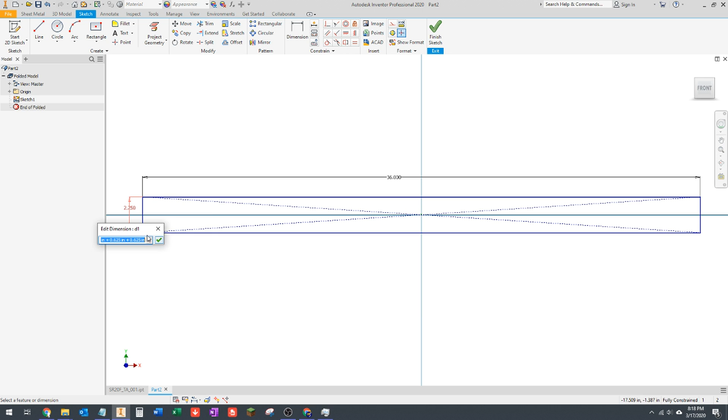Yeah, so I think what I'm going to do right now is make this sheet metal section. It needs to have 1 inch, it needs to be 1 inch wide, for basically modeling this face here. It needs to be... where's my 1 inch wide, and I think I'm going to add 5/8 of an inch on either side for clearance. We might reduce that down later.

Normally when you are CADing something, you have a few more design constraints than this. We've got to kind of make up our own design constraints when we're doing practice CAD.

I'm using 1/16 inch aluminum sheet metal. All right, so this needs to be 1 plus 5/8 plus another 5/8 minus the thickness of the material. So it should be 2.25 in that direction, it should be 2 3/16 in this direction.

Yes, okay, so then we're just going to put a 1 inch flange there. Actually, we're going to do that.

All right, so then Autodesk Material Library, we'll set this to the correct material, which is this aluminum 5052 H32. That's exactly the alloy and heat treatment that we buy. Then I just give it the next number in the list.

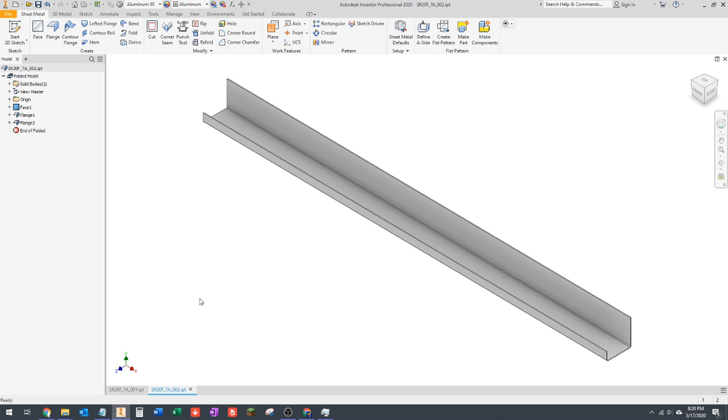We're going to try to keep each half of the tube sections identical because they are rotationally symmetrical, so we can just take this part and rotate it 180 degrees, and it's this part on the other side. So I typically, when I'm doing CAD, don't do a lot of sub-assemblies because I find them obnoxious to navigate through.

So we're going to kind of just plop this whole mechanism in one big assembly. If you don't choose to do it that way, that's fine, on your own CAD, that's just what I do. I think for people who are newer at CAD, it's probably better if you make subassemblies, just because it's easier to keep things organized that way, and you don't have to worry so much about assemblies with a lot of constraints, where those constraints can start to interfere and cause issues.

Changing my visual settings here to make this easier to work on. All right, so going to constrain that to there.

I'm not really bothering - the purpose of this live stream is to kind of teach CAD and teach design. I'm not going to bother teaching the controls for Inventor. We've got CAD class resources from a year or two ago that go into all that stuff, so I'm using mostly keyboard shortcuts and stuff just to make this go faster and be a little more interesting to watch.

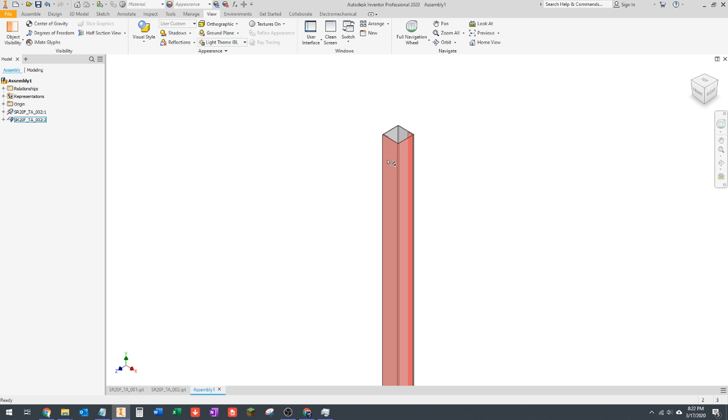All right, so what we should have right now is 2.25 in that direction, 2.25 in that direction. So we're just going to kind of rough out all of our sheet metal all the way up to the final stage. Also, I don't know why that grounded that first part, I shouldn't have done that, but it's fine.

We'll unground it later. Okay, so we're going to place in our tube. I'm rotating things like that to keep known pieces of geometry at the top or the bottom. So that should be a 5/8 offset.

That should also be a 5/8 offset. Now, I think we're going to start with when you have a cascading mechanism like this, it's easiest to design it so that part of each stage is sticking out of the previous stage. There are ways to design it so that everything's completely flush, but because I've never designed one of these before, I'm not 100% sure what those would be, and I don't want to take the time and effort to do it.

It is possible my phone might die here. Should be fine for now. Okay, so I'm going to give this a save. I'm going to call it SR20F TA assembly 1. There will probably be only one assembly, but we might do some sub-assemblies for bearing blocks or something as we get farther along. Don't need that open at the moment.

We're going to just go ahead and do a save as on this and call it 3. So this will be stage 1. Okay, so then what we're going to do is go in here, place this 1 inch with 2.25.

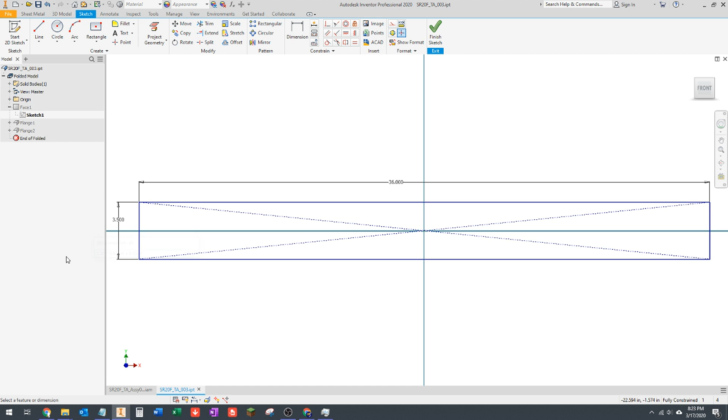It's been a few years since I've used SolidWorks, but a key difference between SolidWorks, at least when I used it, and Inventor, is that Inventor keeps those equations in those boxes, and SolidWorks kind of solves the equation and then gets rid of it, whereas Inventor the equation stays there, which is kind of a nice feature in my opinion. I suppose it depends on how you use those equation features.

All right, so going to do the same thing on this stage as we did on the previous one, constrain it all together in a way that makes some amount of sense. All right, and there to there, and that should be a 5/8 offset for all of these. That 5/8 number is kind of arbitrary, but mostly it's derived from it being an 1/8 of an inch larger than the bearing that we're going to put in here.

And now there can be slots for the bearings, and we may end up having to do that because we got to deal with this flange and everything, and the gap between that and that is exactly 1/2 inch. However, I don't know exactly where the bearing is going to be, left to right in here, because if it's right here on the corner, then it'll interfere with this flange, and we'll have to notch the flange where the bearings are. But if we move it over a little bit, then the bearing will clear completely.

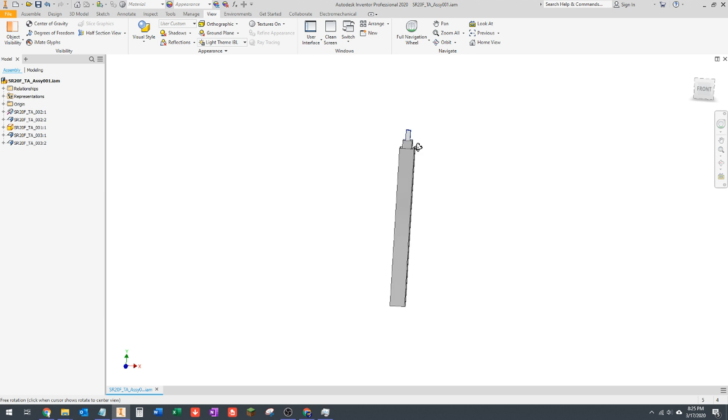So, all right, let's—I closed that part. I don't know why. Let's do one more save as on this. This was 3 inches, right? Not there. Oops, clicked the wrong surface. Oh, 3.5. Okay, so this is 3.5 in that direction and 3.5 in that direction.

Everything is as it should be. All right. So then we'll do the same thing we did before. Take 2.25 out of here, put in 3.5. Oh, shoot, I forgot to pause.

Yes. Hang on, I gotta wait for this to sync. Okay, pause syncing. All right. And then this flange, do the same thing. See, that's what happens when you don't pause syncing—when you save it, it starts syncing to Google Drive, and then if you try to save again a few seconds later, it won't let you edit the file. So you gotta wait for it to sync, then turn off syncing, then save it.

All right. Oops. 1, 2, 3. Back where it was. Z. Now the reason I'm rotating this three times is just because I have a particular side of the sheet metal that I had intended to be the top, and another side that I intended to be the bottom, and I'm trying to maintain that.

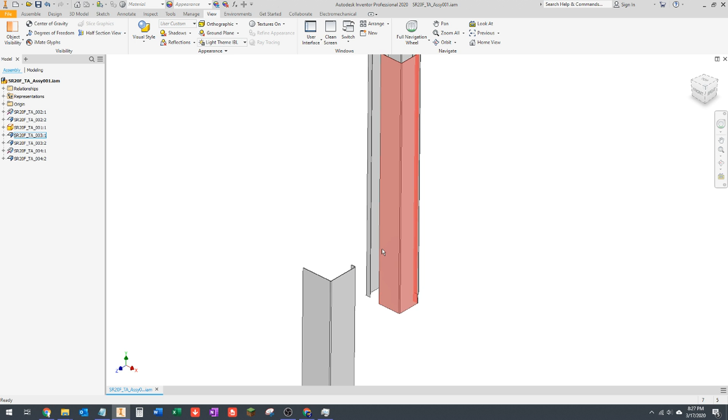All right, so I went ahead and grounded this at origin. So I'm going to go ahead and unground the first part, so I can kind of move all this stuff out of the way. You should always have a grounded part in your assemblies, especially in Inventor, but it applies to SolidWorks, and I'm sure Onshape too. I haven't used Onshape very much, but there we have it.

Alright, so that's all locked into place, and we should be sitting at 4.75. So fairly bulky, but not an unreasonable size.

If this were to be a primary mechanism on your robot, like an extendable arm for placing game pieces on some scoring element, then this would be a perfectly acceptable size for that. If this were a climber and you wanted two of these, one on either side of your robot, this might be a little bulky depending on your packaging constraints, but I think it's a good starting place for me, having not designed one of these before.

Alright, so let's pull all this stuff out. Okay, so I think we're going to go... So when you're designing any kind of elevator or something like that, when it's extended you've got this overlap. Not sure what to call it, but it's just the final overlap of the stages.

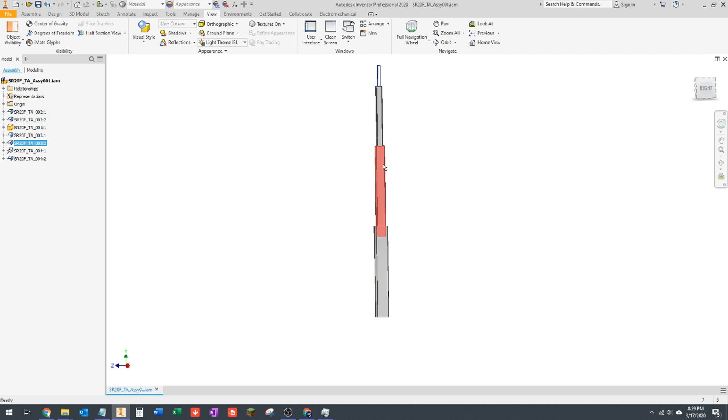Basically, the smaller the final overlap you have, the more extension you get for a smaller overall package height, which is a very desirable feature. However, the more flimsy the mechanism is when it's extended. We're going to go ahead and be what I'd consider fairly aggressive.

I was going to do 4 inches, but now I'm kind of chickening out. I think maybe 6. That's still pretty far.

Alright, so let's start doing some constraints here to kind of lock in this extension and take a look at this. This isn't super critical to figure out right now, because we can figure it out later, but I want to start getting these in here so we can start putting components in this assembly. So I should click the other one first. And then there. Alright, so I think we're going to have them start at 1.5 inches because we're going to need a pulley, like a timing belt pulley, to stick completely out the top.

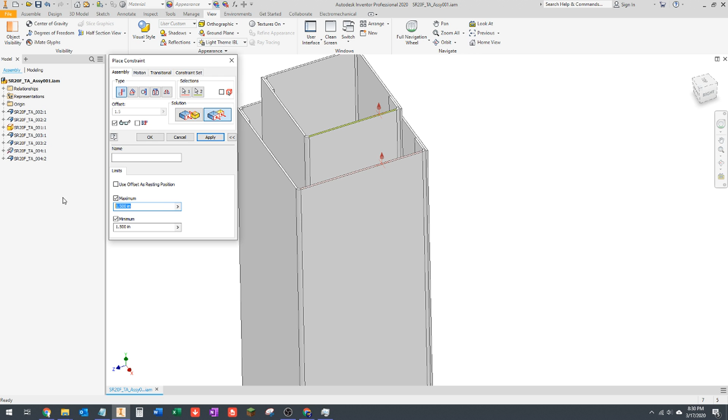Let's see here. Okay, and then the maximum that we could ever go would be the length of the tube, which is like 36 inches right now. So if we want 6 inches of overlap, the maximum would be 30. So when we pull this out, it'll stop, and then we should be able to measure 6 inches of overlap.

Yes. Alright, so we're going to do the same thing on all the stages. We're going to click the lower stage first, then the upper stage, then fill out our minimums and maximums. So 30 max, 1.5 minimum. Make sure that actually works.

Good. And then this tube we might end up making a little longer, because it's helpful to have a little extra sticking out the top on the final stage to actually mount your mechanism to.

Alright, so from here we're going to set up the constraints the same way, but if we make this tube longer, we'll have to adjust these. So maximum of 30, minimum of 1.5.

Alright, okay, so fully extended we get, let's see, an overall height — that's probably the best way to do this — 126 inches. And with everything collapsed, I'm not going to bother rigging the continuous versus cascading behavior of this. It's just too much of a pain in the butt.

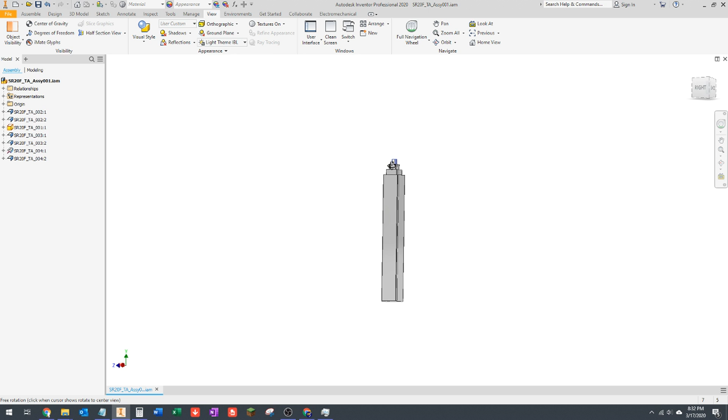So 40 — this is obviously way too tall to fit on a 2020 robot that fits under the trench. You'd need this whole package to be closer to like 22 inches or something fully collapsed, and that's including a hook.

So this actual telescoping part would need to be quite a bit shorter, unless you mount this on an angle — like have it on your robot at an angle and then actuate it up with pneumatics, which a lot of teams have done.

Alright, so okay, let's figure out where we're going. Stream seems to be okay.

I see several of my students and several people who are not my students in the chat, so hello everybody. Let me know if we're dropping frames or doing stupid stuff. OBS is not happy, but it is functioning, so that's about all that can be said about everything right now.

So one of the things you can do if you need to get more stroke length or a lower collapsed height is you can do some work to take this from 1.5 inches, or whatever it is on your design, and make this smaller — bring it down to an inch, maybe get it down to half an inch. And as we get some more components in here, we'll start playing around with those dimensions.

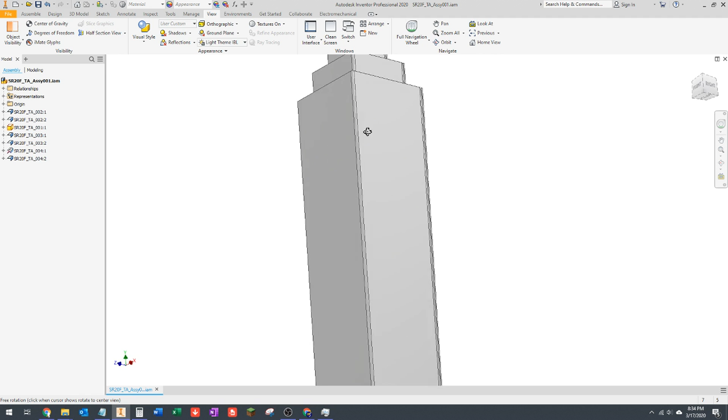I'm not 100% sure if it makes more sense to put the rivet holes in now. Normally I say to everybody, do not put rivet holes in until you're absolutely done. But in this case, the rivet holes will tell us where the rivets are going to be, which is a fairly major obstacle to the actual mechanical function of the mechanism.

So it's probably going to be most helpful to put the rivet holes in. And actually, because I copied this part 3 times, I kind of wish I had put the holes in before I copied it, but I guess that's what I get. So we're going to just go ahead and put these holes in real quick.

We always, on Stellar, use 3/16 rivets. So that's what we're going to use here. The hole size for that is 0.196 inches. Use the hole feature.

I always pattern the hole feature. I don't pattern the center points in the sketches. I pattern the hole feature. This will be like 71 holes.

We'll do one every half inch. When you actually build this, you would never put a hole every... you know what? Actually, because we're going to have bearing shafts and stuff in here, I'm actually going to change that. I'm going to go to 36 holes an inch apart.

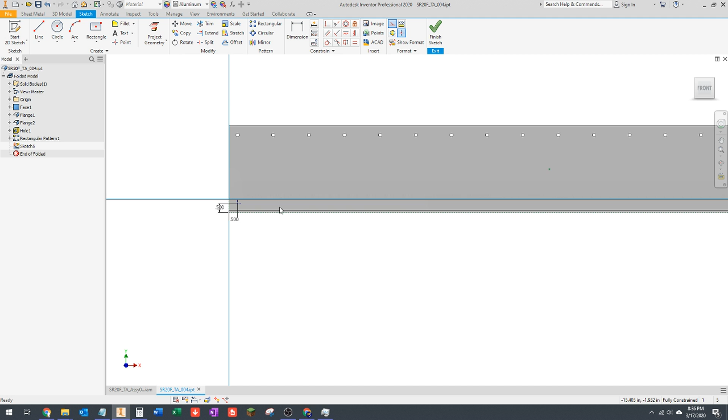All right, so we're going to do a hole. We're not going to send the hole through the back side just yet. We might go back and add the holes over there because they might be useful for mounting stuff later on down the road. But for now, we're just going to put it through just this flange.

2-inch spacing, 18 holes. All right, then we just got to do that 3 more times because I was an idiot and I didn't put the holes in before I copied the parts. So here we are.

It shouldn't take that long though. Once you figure out a piece of geometry, it's pretty easy to go in and do it. Repeat it a couple of times if you need to.

2 inches, 18. Oh, did I type? Why did I do that? Okay.

Construction geometry on. Notice I'm measuring to the very edge of the part. I'm not measuring to this tangent line. That's pretty important.

Okay, so every 2 inches, 18 holes. Give it a save. All right, next one. This will be the last part.

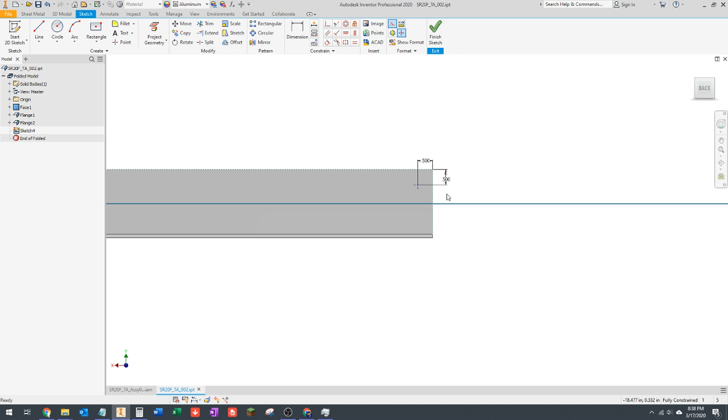So what we'll do once we're done here, we're going to pull in some bearings and start trying to locate bearings for all of the stages. We'll start with the bottom one and just work our way towards the top. Or maybe we'll start at the top. I think we'll start at the top and work our way towards the bottom. Okay.

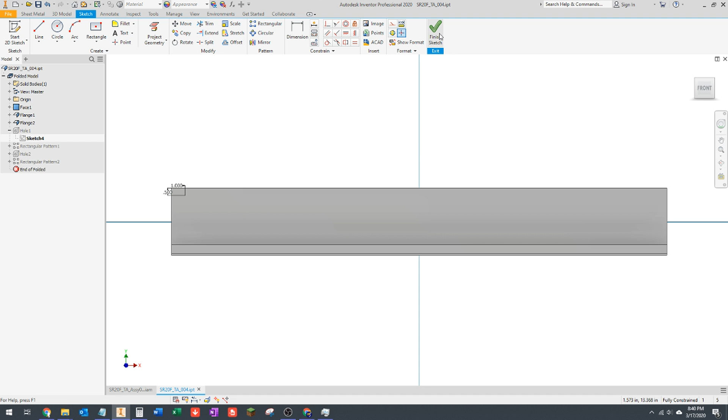This is why it's nice that even though I didn't copy all these parts, I went and did all the dimensions and geometry the exact same way, so even though they weren't copied, you can't tell. I modeled every single one of these the exact same way.

All right, give that an update. Okay, so now we have the ability to rivet this together. We'll go in and add corner rounds and everything when this is completely finished.

Let's flip over to our sketch here. Hard to tell, but basically these top bearings are going to mount to this stage, so there's going to be bearings on all four sides of this tube.

Let's get an angle here. There's going to be bearings on all four sides of the tube. I think it'll be 2 bearings per side, because that'll provide torsional support so it can't twist and pop out of the bearings. So there'll be 1, 2 bearings on this side, patterned all the way around. So 2 bearings on each of the 4 sides at the top. And then we're going to have...

The next thing is going to be the tricky part. I kind of wish I had thought of this before I modeled all of this.

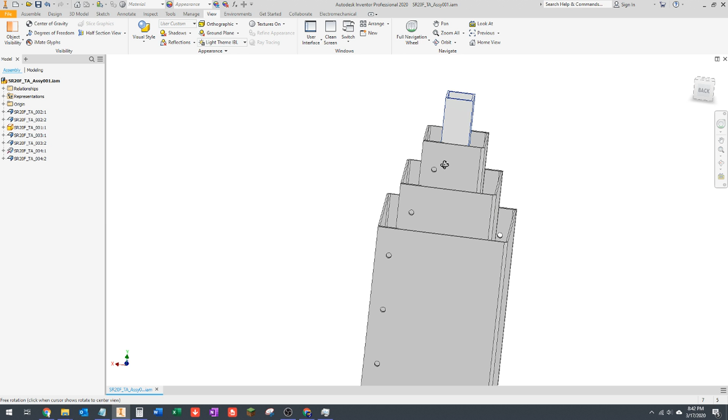My plan was to have the bearings down at the bottom mounted to the upper stage. So for the 3rd stage, this tube, I'd have brackets that rivet to the sides of the tube to support the bearings, and the bearings would roll on the inside of the previous stage. The problem with that is going to be twofold.

First of all, this flange is at a different level than this over here, which means I'd have 2 bearings mounted at different distances, and I don't want to deal with that, because it's going to cause a cascade of other problems and add complexity—you'd basically have to put the bearings on different shafts, which isn't particularly helpful.

The other solution would be to have the bearings roll in the middle, but that potentially gets in the way of the belt. I suppose we could do a hybrid solution where we have bearings that roll in the middle here, right on this outer piece, and the same on the other side, plus a bearing here and a bearing here, leaving room for the belt in the middle.

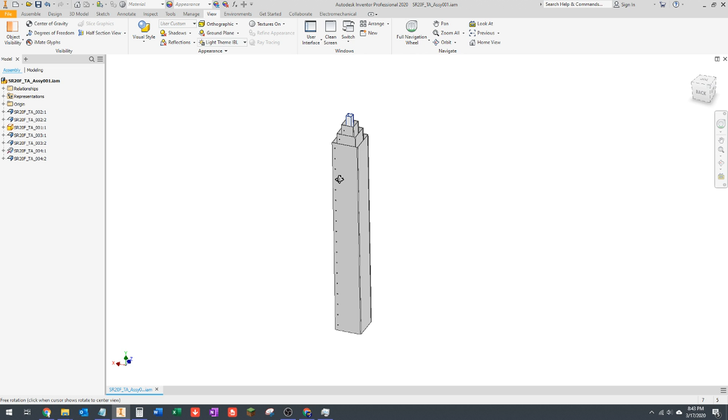So actually, I'm wondering if it might be better to get the belts in here now and do that first, and then do the bearings after, because the belts take a lot more room and have to be in a specific spot, whereas the bearings can kind of just be stuck wherever they fit. So let's do that.

Also, one note—I'm not going to do this. This is the drive, so this would be like the motor that drives this pulley. It's going to be moved down because there's only 90 degrees of wrap on this pulley, which isn't enough to drive a high torque mechanism like this. But we'll cross that bridge.

This belt path is going to be a pain in the butt to design—probably not going to get to that tonight. I'm probably just going to place this pulley and this pulley with a dummy belt in there for now, and come back to add the gearbox and stuff later.

All right, let's see. Let's start at the top. Basically, on one side—I'm going to say this side—we're going to need a pulley. We'll have to cut a hole in here, and then have a pulley with a shaft that goes across, where the pulley can bridge the gap between here and here.

The problem with that is from here to here is 1.188 inches, so the middle should be right in the center. Is that right? Yeah, the middle of where the pulley would be is right in the center of this piece of sheet metal, which means if we want a shaft going all the way across, we've got to cut a slot in this, which takes away basically all of the strength.

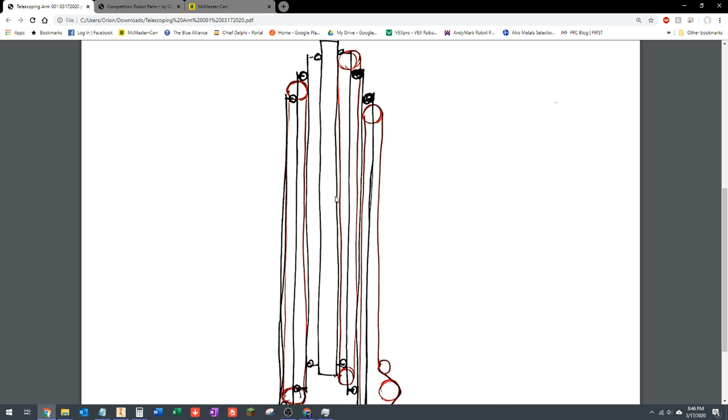So I don't know, I don't really want to do that. What I'd rather do is shift the pulley to one side or the other and add spacer blocks or something. This drawing doesn't do a great job explaining it, but the belt is basically attached to this stage at the bottom with a clamp, or you could even drill a hole in the belt and rivet it in place. I'm not sure the best way to do that. Probably with a clamp, that's probably how we're going to do it.

Maybe a 3D printed one with some teeth in it. Basically, the clamp would go on the inside of the belt and bolt to this upper stage, and the same thing would be done on the two stages previous to bolt to this stage, and that's basically how you rig a cascading elevator.

So as this intermediate stage goes up, this clamped spot here to the lower stage basically moves down relative to the intermediate stage, which causes the belt to roll, which causes the upper stage to move up in relation to the intermediate stage. That's a kind of difficult motion to describe. So if you don't understand what I'm talking about, I'm not sure I'm going to be able to do a better job explaining it here.

It makes a little more sense if you see an animation of it, and it makes 100% complete sense if you actually have a physical device in your hand to move around. It's a fairly intuitive motion, it's just not necessarily intuitive unless you have a physical one in your hands.

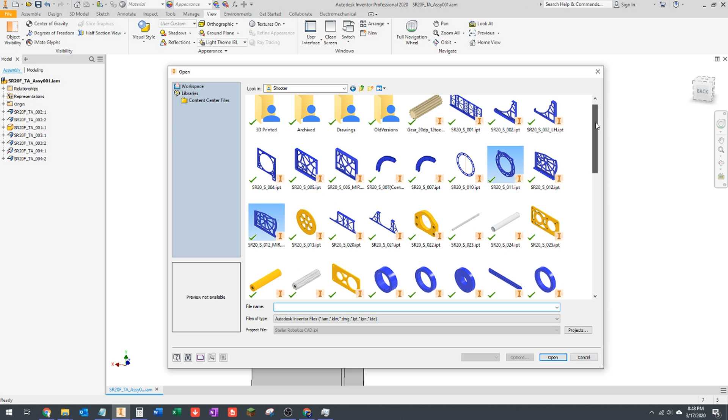So we're going to cheat a little bit and just grab one of the Stellar Robotics CAD models. I'm going to grab this contracted one because that's a little easier. We're just going to copy that, take it over to our telescoping arm folder, paste it down, give it a number, and then open it.

All right, so this is 18 teeth. Basically this is designed to be 3D printed with no support material, which is why the flanges have these 45-degree angles to avoid creating an overhang. This is for a 15mm wide belt, but we're going to do probably a 9mm wide belt, so we're going to make this a little smaller.

But before we do that, this diameter here is basically where the top of the belt comes to. So this is 1.186 inches. And what's this gap across 2 stages? 1.1. Oh wow, it's almost exactly the same size. All right, we got kind of lucky there. That being said, that still puts the shaft right in the middle of this, which we don't want to do.

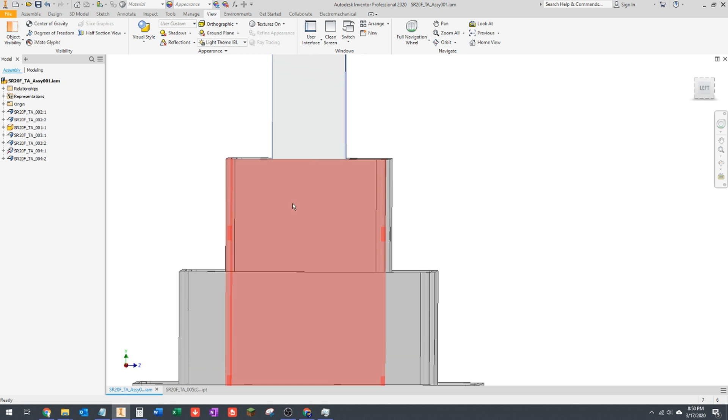Let's see, couple of things we could do here. We're going to modify the bore of this and just put idler bearings in here, and we're going to use the same bearings for this shaft as we are for the rollers here. So let's do that right now. I'm going to suppress this, it's probably going to break a bunch of stuff. No? All right, cool.

All right, so let's create a sketch. Let's project that and then slice the part so we can see what's going on here. So what we're going to do is create this on the other side as well. Construction geometry - actually no, I don't want that to be construction geometry. So we're going to connect the two with the center line. We're going to do a revolve cut because we're going to do a fairly complicated shape in order to allow this to still be 3D printed.

All right, so we're going to make these two collinear. We're going to make... come on, clicking stuff underneath here. All right, that's going to be 45 degrees. Come on, that's going to be 45 degrees. All right, so this needs to be 0.196, which is the thickness of the bearing. Oh, where'd it go? Let's not do that.

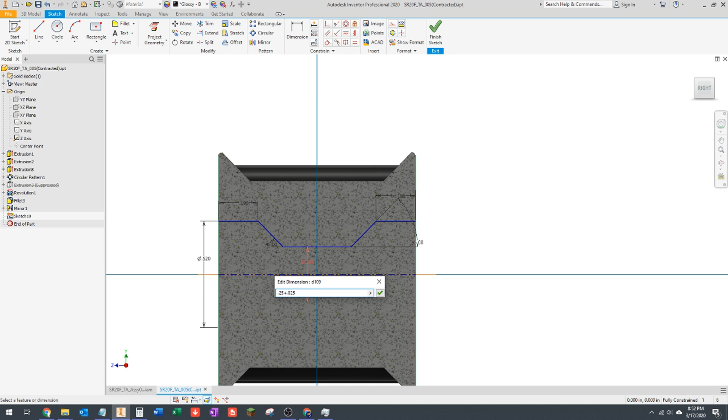Let's create a few dimensions here. 0.5, and then 3D print. Our 3D printers like to shrink by 20 thou on inside holes, so we typically add 20 thousandths to stuff.

The reason for these 45 degree chamfers here is we want a counterbore basically for the bearing to sit in, and then we want a shoulder on the inside of the pulley for the bearing to stop against.

But we can't 3D print a square corner without support material, which we could do, but when you're using a fairly cheap printer like we are, support material creates a nasty surface and it's a pain in the butt to clean off, so it's labor intensive. So we always try to design our parts so they don't need support material, and little tricks like putting a 45 degree angle on the top of an overhang is a good way to do that.

So a bearing will go in here, and then a bearing will go on the other side, and then a 1/4 inch bolt will go through the middle, and the 1/4 inch bolt will be the shaft that this just spins on.

The drive pulleys will need to have this hex bore. We'll turn the hex bore back on for those, but we'll do a save as on this a little later when we're ready for that, and delete out what we did and turn the hex bore back on.

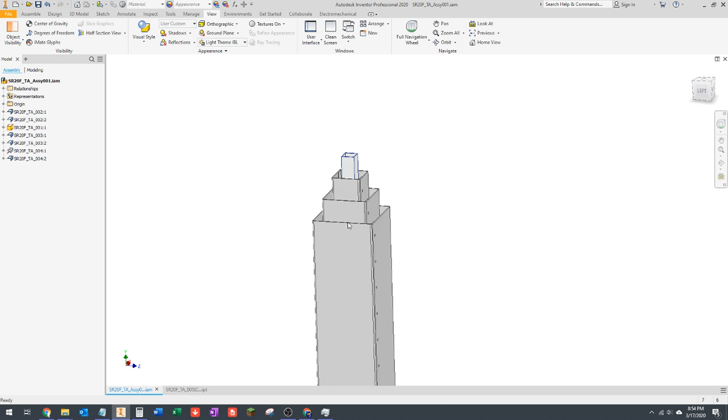0.709, so how much room? From here to here is 0.125. That means if we wanted to keep a pulley centered, we could put a little square hole in here. I'm trying to figure out a way to have the pulley stay right centered on this piece so we don't need spacer blocks on either side. But I'm not seeing a good way to do that.

Alright, I'm going to pull up a link here on my phone. I sent it to myself earlier. Should be way up at the top. Bear with me here.

Alright, so pulley diameter chart, in case I needed to change the size of these pulleys. It only goes down to 16 teeth, but we shouldn't need that because you never really make HTD pulleys less than 16 teeth. The belts aren't really supposed to bend that tightly. That being said, it would be kind of nice if we could.

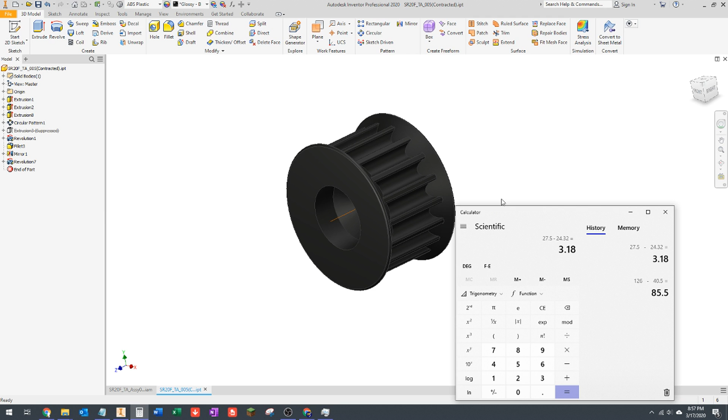So to go down to 16 teeth makes the diameter of the pulley—this is an 18 tooth pulley, by the way—go down minus 24.32, so 3.18 millimeters in diameter. It goes down that much, which is almost exactly 1/8 of an inch.

So the pulley diameter only goes down 1/8 of an inch, which only moves the center of the shaft from right smack in the middle of this piece of sheet metal over 1/16 of an inch, which doesn't really get us anything. Give me one second here, I need to respond to this.

Okay, so I think we're going to leave it at 18 teeth. We are going to make these flanges a bit smaller to make the whole thing a little smaller, because we don't actually need the flanges to come up flush with the top of the belt. But we do want this whole thing to be narrower, so we can shave off some space in a couple of places.

All right, let's do this. This is kind of a mess, the way that I did this. This is 3 millimeters, and then this needs to be—I gotta change the way I did this—and then minus 1, like that. Yeah, and that changes both sides. And then I need to make the whole thing, and these, instead of 4 millimeters, need to be 3 millimeters.

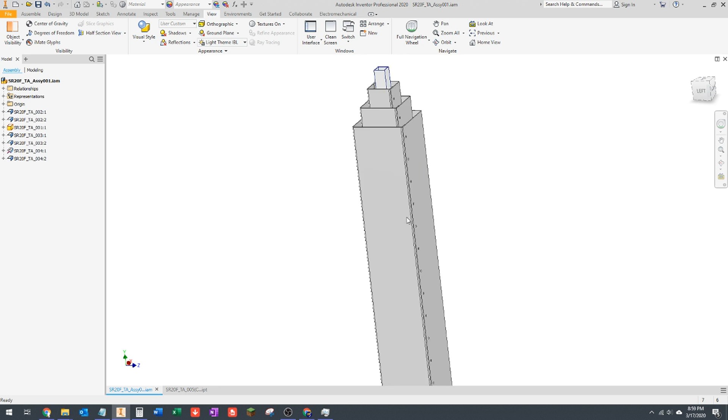Oh yeah, and I realized we don't actually need the slot to be on this side, because we said we were gonna put it here. Is that right? Yeah, because we're gonna put a bearing in the middle on this side, and then on the corners here and here, down at the bottom, I mean. And so that means we can put a belt pulley in the middle here. Do we have enough width for that?

We should. It's going to be really close, but some of this stuff we're going to have to just start going, and I'll figure it out as we go along here.

Okay, so we've got our pulley. All right, so what we can do here, so we need to somehow have a piece that suspends a shaft right in the middle of this part. So let me refer back to my sketch here. Yeah, all right, so let's take this, and this is why I had a specific side that was the top. This side is the top. And it's actually this bottom face.

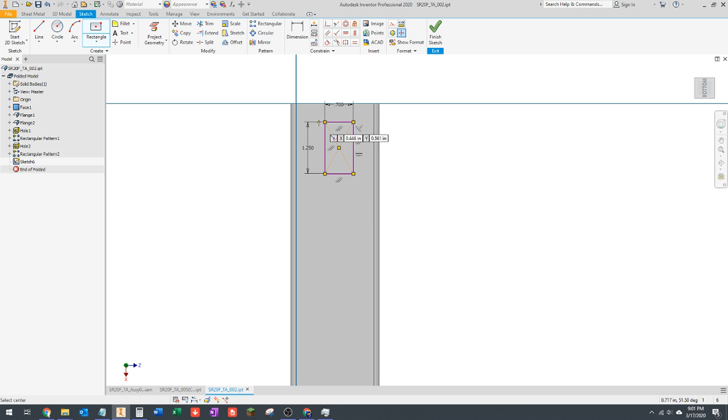So what we need is, well, we'll just do like 1.25 in this dimension and 0.7 in that direction. Project these two sides, put a line across the top, connect that there, and make that line vertical. Oops, I guess I did turn it, so it's that way. Can we make this point?

Oops. Ooh, that's really close. How far is that? 1/8 of an inch. I think it's fine. Okay, so now that gives us clearance for the pulley. Actually, we'll just go ahead and cut that hole.

All right, so there's a slot for a pulley. And this is the part where we might want to make the two halves different because we only need this hole on one side, and we're just losing strength by putting the hole on the other side. But for now, we're going to keep them symmetrical, and we'll call it a lightening hole on the other side. Not great practice, but it's fine for what we're doing.

Okay, so now what we want to do is we don't want to have to take a bolt and go all the way across from one side to the other, because then, like I was saying earlier, we've got to cut basically a groove, like a slot in the sheet metal, which basically loses a lot of strength if we do that. So we would rather start the shaft in the middle somewhere, like kind of just cut a small slot here, and on the other side have the shaft kind of drop into that cup and then stay there. So I can think of a couple of ways to do that.

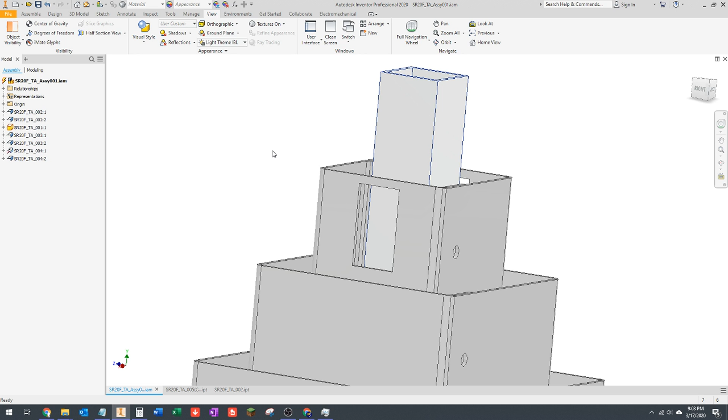I think that they both are going to require that we design some 3D printed parts. I think do it with 3D printed parts. I'm trying to think here of a different way we could do it. I'm trying to avoid machined parts, which we could normally use in this case.

I'm trying to avoid machined parts because Stellar doesn't have a lot of mill-based machining resources, and so that's why I'm designing this with the kind of collection of fabrication resources that we have. We have a sponsor that does sheet metal for us, and then we have a little bit of machining resources, but not extensive enough where I'd want to rely on it to make complicated parts for something like this.

Okay, so I think what we're going to do is we're going to use a dowel pin, and then we're going to capture the dowel pin in a slot and then hold it in place with a 3D printed part on either side. I'll do a little bit better job explaining what I mean as we go.

So this is what, 0.7? Yeah. And this whole thing is 2.25. Puts it from here to here. All right, we'll look for like a 1.5 inch dowel pin. Dowel.

Plane. We need 1/4 inch. And then I need 1.5 inch long. What's like the cheapest one? Oh, these are like oversized though, aren't they? Black oxide.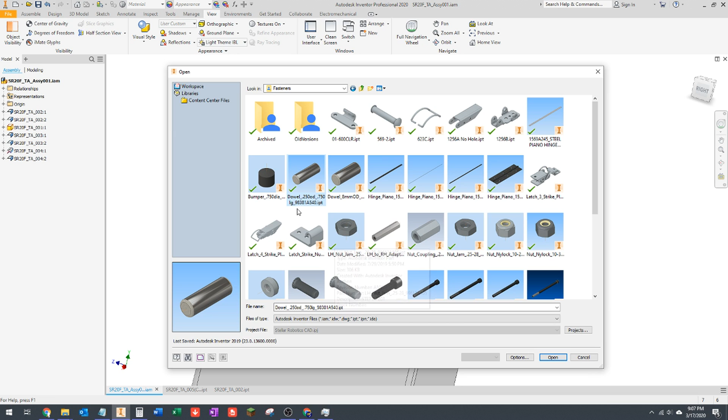I think I already have a model of a dowel pin with the chamfers in it. I don't want to bother downloading that CAD model and importing it. If I already have one, I can just modify it. That would be under fasteners, we have a standard parts library. Yeah, I do. Okay, so I'm going to open this. This is one that's just shorter.

Just do a save as, 1.500, and then I want to put the McMaster part number in just so it's correct. All right, save.

I even put in the colors and everything so it looks nice, because they cold head these, as far as I know. They basically have a machine that cold forms them out of wire to make these ends, so they're really rough and not super precise in the ends. Then they put them in a centerless grinding machine, basically - a special machine that works in bulk and just grinds the cylinder, and doesn't grind the ends. There are higher dollar ones, as far as I know, that you can get where the dowel pins have ground ends as well. But typically, the things you use a dowel pin for, the ends don't matter, like what we're doing here.

All we care is that the bearing slides nicely on the cylindrical part of it. Okay, so this is going to be 0.25, we'll oversize a little bit by like 5 thou. Then we'll do 1.5, and we'll oversize it - actually, we'll oversize it like, I don't know, 20 thousandths. That should be good. Okay, all right, so cut there.

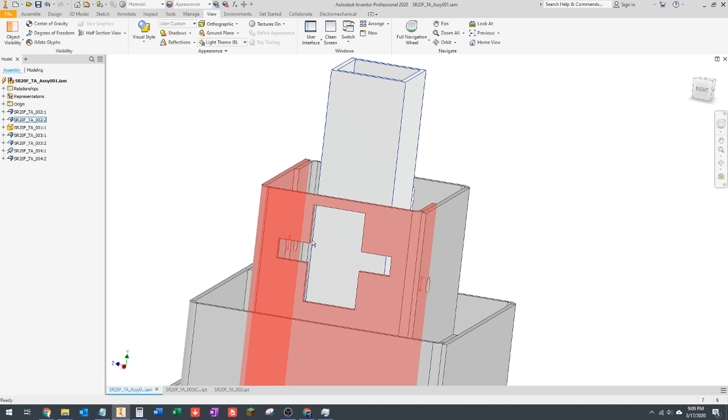All right, so now what's the smallest we can do this? All right, so basically the dowel pin will lay sideways, centered in this slot, and then we'll have something on the front that holds it and something on the back that holds it. And then we'll put a screw through the top and the bottom, kind of like a little pipe clamp or something, and it'll be 3D printed.

But we've got to make sure that however we fasten it, it's not going to get in the way of stuff. Stellar's had a decent amount of luck tapping 3D printed parts - not in high load circumstances. However, in low load circumstances, like what we're dealing with here, it should be okay. So we'll just have a screw on one side and a tapped hole on the other, and that should be sufficient.

All right, yeah, it doesn't matter, I don't need dimensions. Okay, so what we're going to do is a 0.255 - actually, I'm not going to oversize it like that, I got to account for shrinkage here.

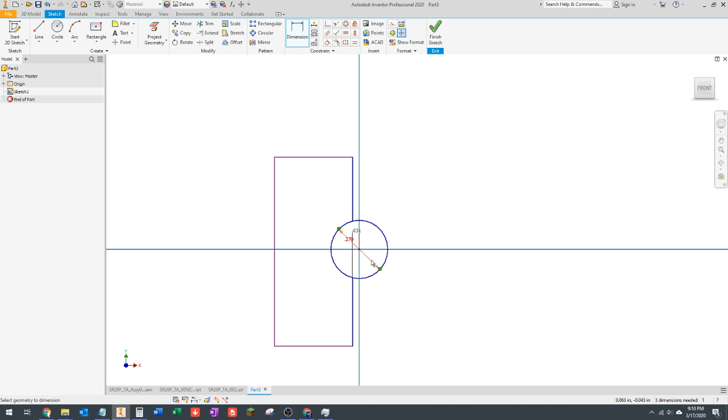All right, so make those collinear, and this offset here represents half the material thickness, because one is going to be on one side of the material, one is going to be on the other side, and the dowel pin is going to be constrained in the middle. So we'll make this 1/4 inch, and then we're going to need at least 3/8 of an inch on the top and on the bottom for support for the screw. So that's 3/8 plus 3/8, which is 3/4, plus another quarter, which is basically 1 inch.

We'll just do an equals constraint, so that's symmetrical. And then this is the dimension we got to be careful of, because we don't want it to stick up too far. Do we think we can get away with that? I think we can get away with that. All right, so we'll do this, we'll do that - we're going to want it at least that thick.

And then 2 holes, 3/8 minus - should be just 3/4, like that. Okay, so then we're going to put just a tapped hole, number 10, 32. Oof, that's really close. Yeah, I don't like that.

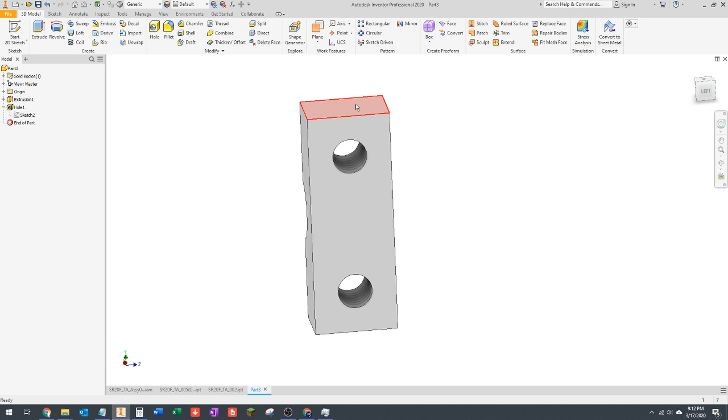Wait, that should have been 5/8 of an inch, not 3/4. There we go. So now it's the same distance from the top as it is from either side. Okay, that looks more like what I was expecting. Inventor doesn't have PLA, so I usually just set things to ABS.

This would get printed probably with this side flat, because it could get printed this way. Actually, this way is probably the better way to print it. So it's okay to radius these corners because that won't create places where it's not contacting the build plate. We'll do a much smaller fillet than that.

I never color anything until the part is actually complete. So in this case, this part is complete. We're not going to make any changes to this part from here on out unless we change the design. So I'm going to go ahead and color it the right color. Plus, we 3D print everything blue anyways. That's just the color of filament that we buy.

It's just Twitter notifications on my phone.

All right, now we're going to do a save as. We'll give it the next number. And instead of the tapped hole, we're just going to do a clearance hole, which will be 0.196 plus 0.02 for shrinkage. So those are quite a bit bigger.

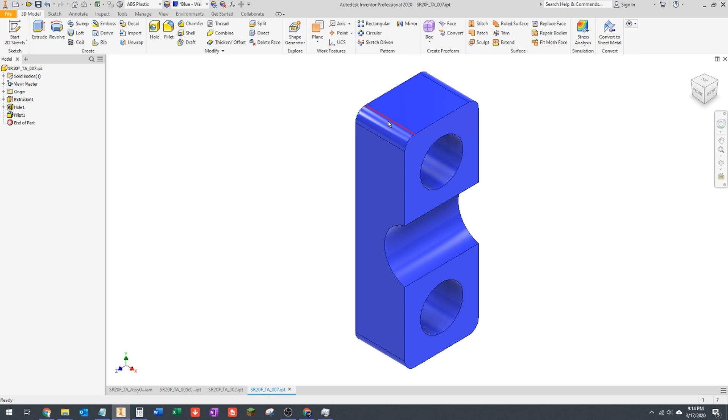This part is on the lower boundary of what I would consider printable, especially for a mechanical component, just because there's not a lot of infill in this part. It's mostly perimeter, which can cause some weird gaps in the part where you don't want it. That being said, there's enough bulk through the body of it that I think it's probably fine, and I'd be perfectly comfortable having this part printed for an actual competition robot during the season.

Okay, so those were 5/8. I want to make sure we've got enough width here. Alright, so we've got to be a little careful where exactly we put this, because there still has to be a bearing that rolls up and down on this part.

Alright, let's add some holes. I could probably just create a shared sketch for all this geometry, but at this point I can't really be bothered. So we'll have that 3D printed part basically flush with this edge, and then we'll shorten this slot up by however much we need to, or no, I guess we can't, because the dowel pin is only so long.

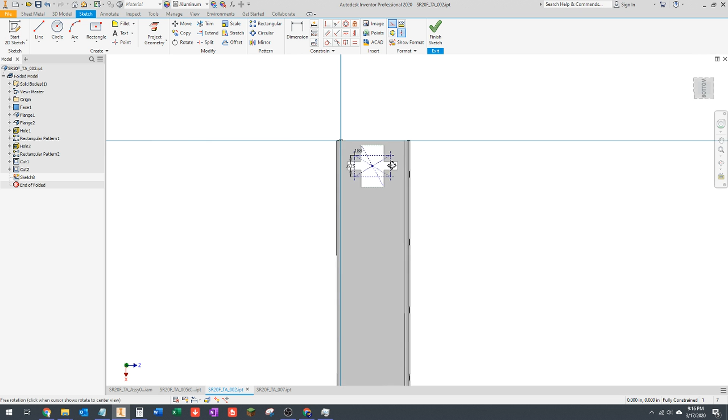Yeah, I mean the stronger alloys, they're just not that expensive to begin with. Okay, so we might go down to a 1 1/4 actually, just so we can shorten the slot up. And it's not really a problem if the 3D printed part is wider than where the 3D printed block is. That's not an issue at all.

Okay, so then this is not a 3D printed part, so we don't need that 20 thousandths to account for shrinkage, so 0.196 is fine. We tend to run a little tighter. We try to standardize on the 0.196 holes just because they provide commonality between number 10 fasteners and 3/16 rivets. The 196 is a little on the looser side for the rivets and a little on the closer side for the 10-32 screws, but having the commonality between the screw hole sizes is really nice, so it's worth it.

We're going to go and create a sub-assembly of this, actually, with the bearings in it, because we're going to place like half a dozen of them, and I don't want to deal with having to put bearings in each one every time we do it in the main assembly. Let's change the visual style so we can actually see where all the edges are.

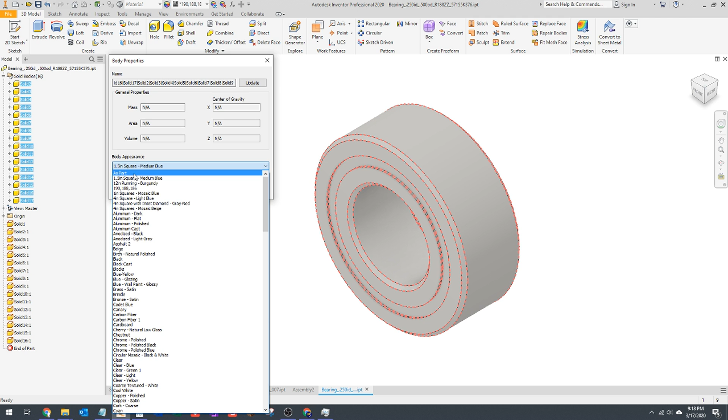This is not supposed to be stainless. It should be steel. And then the appearance should be semi-polished. Ugh. Can I edit properties? Clear all overrides as part. Oh, you've got to be kidding me. Did that not work? Guess that didn't work.

Okay, I'm not sure what's going on. Alright, close enough. Anyways, insert the bearing there, flush with the outside, and then same thing on the other side.

If we look at the way this works internally, there's a little bit of gap here just because of the shrinkage, because we're accounting for the shrinkage of the 3D printed part, but not an issue. We did these for some pulleys on our climber for this year's robot.

So we'll call this assembly just assembly 2. Basically all it is, is just the pulley with the bearings in it, but that'll make placing them easier down the road. Okay, don't need that anymore. Okay, so let's place...

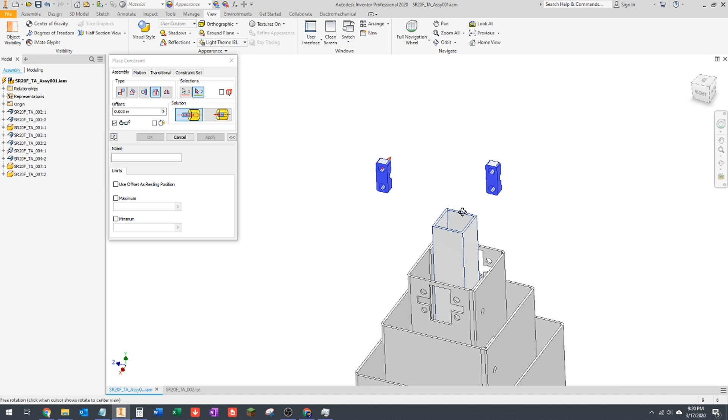We want these on the outside. So we'll use the insert tool to constrain there. And there, and then there and there. That's technically over constrained, but Inventor doesn't scream at me unless they conflict, which we'll just make sure they don't.

And then this is bigger than what it looks like it should be, just because we're accounting for shrinkage on that part. Alright, so now we're going to do the six, and that's on the back side. We'll do the same thing with the insert constraint.

I can't see that hole. There we go. And it's going to be a little tricky. I'm going to have to get it back from the other side, I think. Yeah.

So that to that hole, and then from the other side, the threaded hole to the aluminum. Alright, so now we've got this there to there. Should be a center distance of zero because they have a common center, even though it doesn't look like this is a circle, just because, like I said, we modeled it oversized for different shrinkages and tolerances between the aluminum and the 3D printed part. It is actually correct.

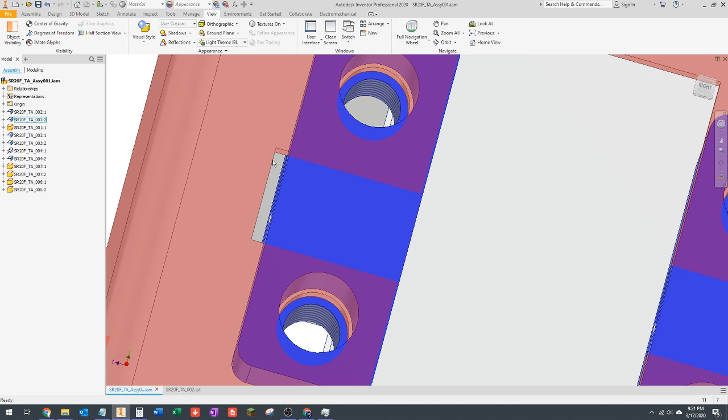Alright, so how much do these stick out? Oh, it's just like a tiny little amount. Oh, okay. So it's not really worth shortening the dowel pin, just because the difference between this being here and this being in here is not going to be the difference between a bearing being able to roll on this surface and not.

And actually, a bearing never actually needs to roll beside these, which I just realized. I mean, it's past my bedtime, so I'm going to give myself a pass on that one, but I just realized I didn't even need to worry about the bearings because this never goes down any farther. That's the whole point of having the pulley up high like this. Okay, so moving on from there, that just makes our life a little easier.

So fasteners, the new dowel pin. We'll use just a center line constraint. And then how wide did we make this slot? We made it a little oversized, so I just want to make sure it's actually centered. We made it 20 thousandths oversize, so from there to there, yeah, it should be like that.

So that is an even gap. And then in real life, this dowel pin will be able to slide back and forth a little bit, but it doesn't matter.

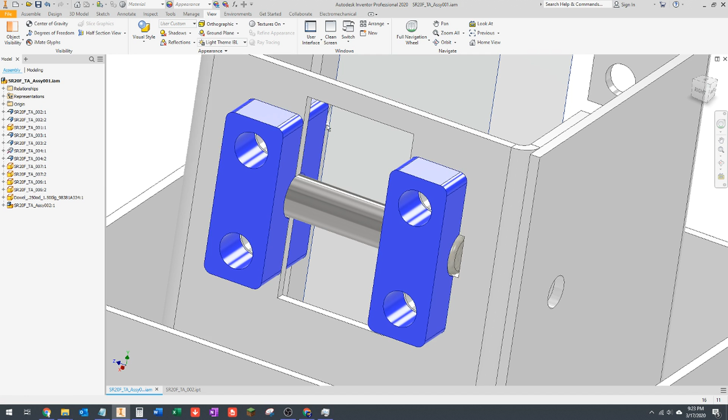Alright, so let's get our pulley assembly in here. This guy. Alright, and so this is 0.630, and this is 0.7. So that's 0.07, so 0.035 should be the gap.

We'll just use the insert tool. Insert to that, 0.035. So to do this properly, there should be a spacer in here. That's such a small gap that you might be able to just do it with like a washer rather than trying to 3D print or cut a spacer.

Because it's Stellar Robotics, and our motto on Stellar Robotics is sketchy at best, we probably just wouldn't put a spacer in there and we would just let the pulley rub against the aluminum every once in a while. If we were really worried about it, we might just put some lubricant or something on it. Although, because this is a belt, that's not a good idea because lubricants can attack the rubber depending on what you use. So we probably just wouldn't worry about it.

But there really should be a little spacer, a tiny little spacer in there that only contacts the inner race of the bearing. I'm not going to model it right now, but maybe we'll do it later when we're putting the finishing touches on this whole thing.

Okay, so from the front surface here to the back surface there, it's about a half inch. It's a half inch plus the 1/16.

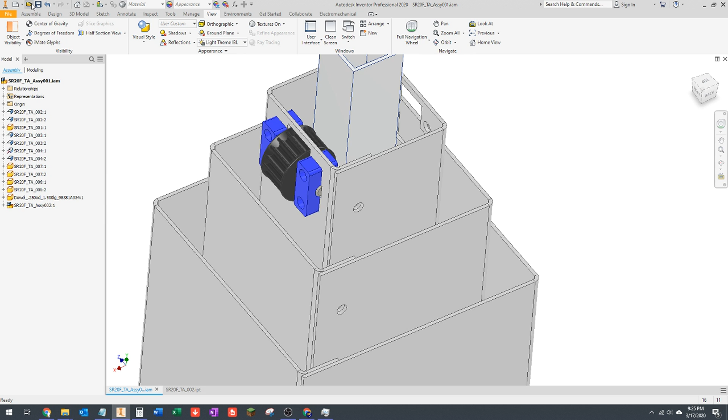I'm going to go ahead and see if I've got a model of a button head screw. I do not. I'm going to go ahead and get one. Actually, hang on, we did those CAD class videos.

Oh my goodness, I don't remember which weeks those were. Oh right, they're not actually in here. They're in 2018 fall, I believe. CAD class gearbox.

All right, I'm just going to copy and paste, and then we just do a slightly different naming convention. So screw on the front, so that all the screws show up in the same area of the file because they're sorted alphabetically. We put screw first, but that's only 3/8. Dang it, I'll leave it in there. We'll use it at some point, but that's the wrong screw. Gearbox, yeah, this is the one that I wanted, the 1/2 inch long button head.

Okay, paste that in there. Put screw on the front, and then BHCS on the back.

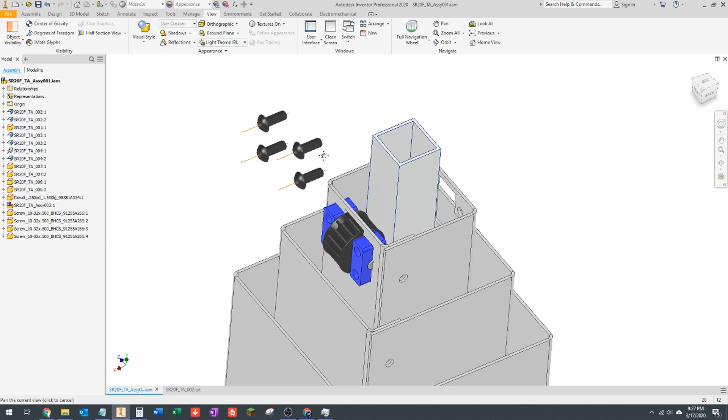I hate patterns. I hate patterns in assemblies. Patterns and I don't seem to get along particularly well. This would be a good application of a pattern, just to place one screw and then do a rectangular pattern. But I've always had better luck just going and constraining each one individually. I find that if we're to make this part longer, we don't have to go in and edit the pattern, we can just rely on the constraints to move the bolts where they need to be.

Okay, that is fairly neat, I think. I still don't particularly like the fact that we have to make these tiny little 3D printed parts, but you know what, I'm going to stop worrying about it, and I think we'll just call that good. It looks like it should be free of interferences with any of the other stuff that we're going to do, so we'll kind of leave it at that and move on.

Actually, we're not going to move on. We're going to do the exact same thing for the next stage. We don't need to remodel any of these parts, we're going to use all the same parts. We just need to cut this slot and these holes in this part here. So let's get this guy open.

So let's start with this. 1.25, 0.7, okay, easy enough. Grab this part. We know this end is the top because they're all modeled and constrained the same way. Start like this.

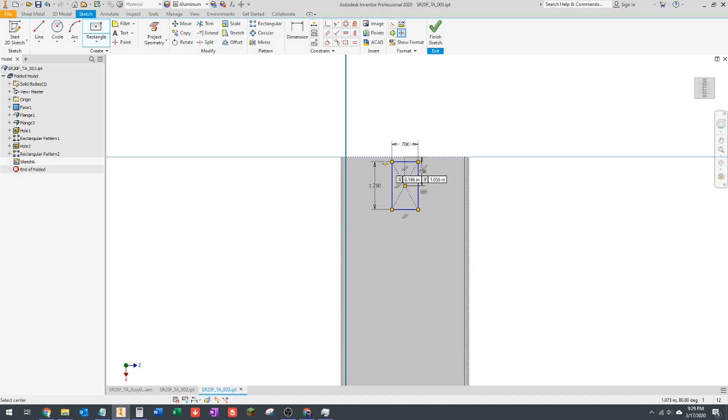1.25, 0.7, and cut. All right, so then we're going to do the same thing here. And then we did 1.5, and then 20 thousandths oversize, I believe.

Yes? Yes, okay. And honestly, I could put these in one cut feature, but I kind of just like drawing the rectangles. Makes it a little bit easier to do this over and over again, just separate ones. Kind of just personal preference.

You do things differently - if you've got to model something over and over for a company or at work, and you know it's not going to change often, and you have to do a lot of similar parts, you're going to model certain things one way. But when you're working in something like FRC where you model it once and have to change it a bunch of times, you don't have to do a ton of repetition, you're going to model things a little differently. So you just kind of have to build your own CAD conventions for the type of work that you're doing.

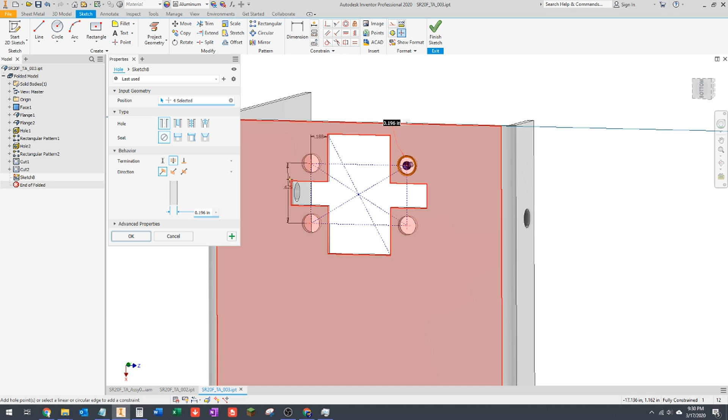The important thing is just to make sure that you do it the same way every time. So you're going to model the same part the same way every time, especially if you're going to model similar parts in something like a single FRC robot. And if you're working in a group, if your team has multiple CAD people, you're going to want to make sure all the CAD people are on the same page in terms of everybody's conventions and how everybody does things, and preferably you find a way to standardize between all the people doing CAD so that everybody does the same things the same way - dimensions holes the same way, uses the same tolerances for oversizing holes, uses the same size fillets, simple stuff like that, where otherwise you'll start to get weird interrelations between different designers doing things different ways.

It's just good practice. Oops, I didn't want this top one, I want to draw that. Okay, so I kind of did this one backwards, but it's fine.

Nope, just fat fingering my keyboard here. All right, cut that one.

Then we'll do the slot for the dowel pin, and then we will do the holes.

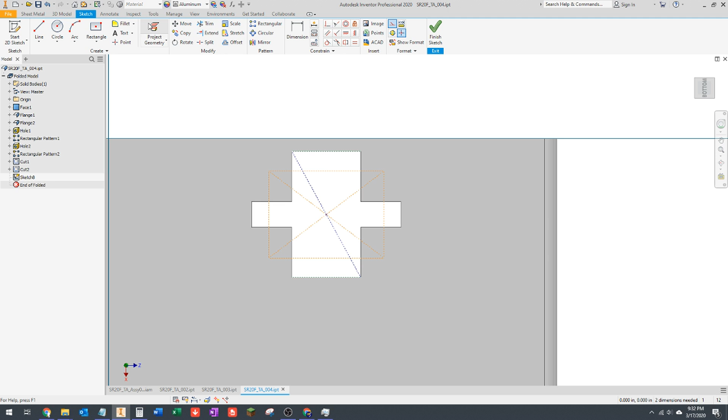The only reason I'm putting these angled lines is so I can use the midpoint to constrain the center point rectangle for the whole pattern. I assume that was self-explanatory, but I didn't mention it as I was doing it.

That's a very common thing I do, a little trick I've come up with. I'm sure other people do it too, but it's just something I discovered on my own in the wild. Highly recommend, 10 out of 10. It's a good trick to use.

Okay, so now we've got this slot thing. Like I said, we don't need another pulley on the other side. If we were doing something crazy or worried about only driving this from one side, we could do it symmetrically, but actually no, we couldn't, because the way we're designing this, we're going to have a pulley over here and a belt running down here, and a pulley and belt running down there. They would interfere, so I take that back.

Okay, so let's see, we need our telescoping arm, the unthreaded one, two of those, and I'm just going to go ahead and plop those down as well.

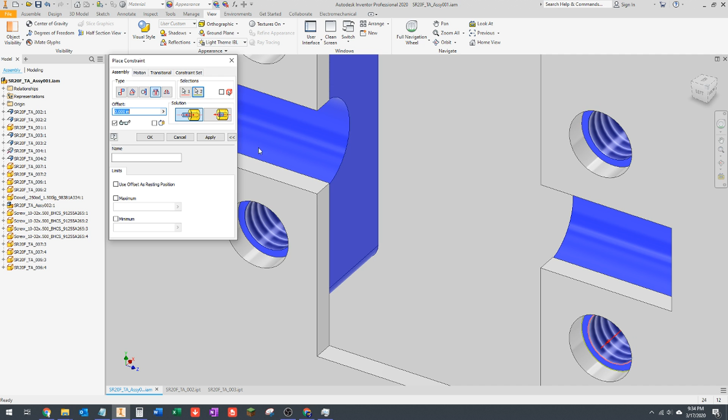Actually, I'm going to constrain these first. That way I don't have to do that whole thing I had to do on the last one, where I have to look through the hole of the outer part to constrain the inner part. So I'll do the inner part first, then constrain the outer part, because that'll make my life a lot easier.

Alright, there and there. And see, once you've done it once and figured out how you're going to do it, it goes a whole lot faster the second time. Okay, oops.

Assembly 2, insert, pick the outer, nope, come on. Whenever I click the wrong thing, I'm just hitting escape and then hitting the C key really fast just to close that window and bring it back up. That's kind of the fastest way to reset the selection.

You can deselect stuff, but I found it's just faster to hit escape and hit the C key really quickly. I've always got my hand on the escape key, or near it anyways. I put my hand in a specific place on the keyboard that allows me to reach the keys I use most often.

Right, we need the dowel pin. I can't remember how I did this last time. Just, yeah, like that. Oh, come on. Center line, and then I just did, I think I constrained this. No, I definitely had the blocks in last time I did it. All right, okay, so that's done.

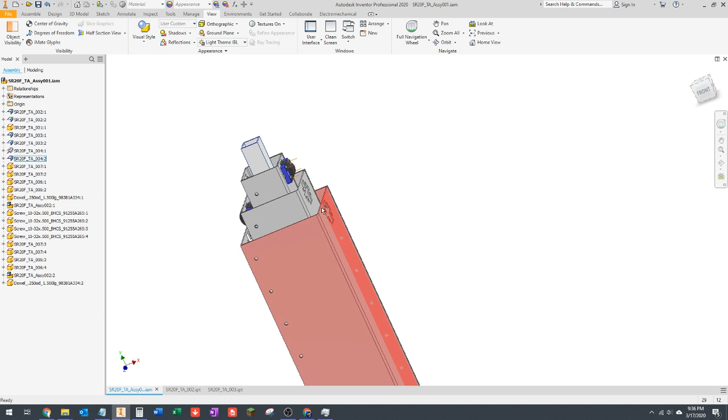So now we just need the little screws, and then I think we need to place one here as well. So we'll just do that the same way. And that outer one is actually going to be driven.

So we're going to put the idler, which is what these are - these are just idlers - down at the bottom, because we're going to have to do something similar to this down at the bottom of each of these stages, which we're probably not going to deal with until after we get the bearings in there, because down at the bottom is going to be a little crunched for space.

We haven't really talked about it so far yet. However, assembly for something like this is a very tricky and very important thing to consider. I put a little bit of thought into it before I started modeling, probably not as much as I should have. But as we get into the clamps for the belts and some of the bearings that go in here, we're going to have to talk more about that and make sure it's actually physically possible to assemble this thing.

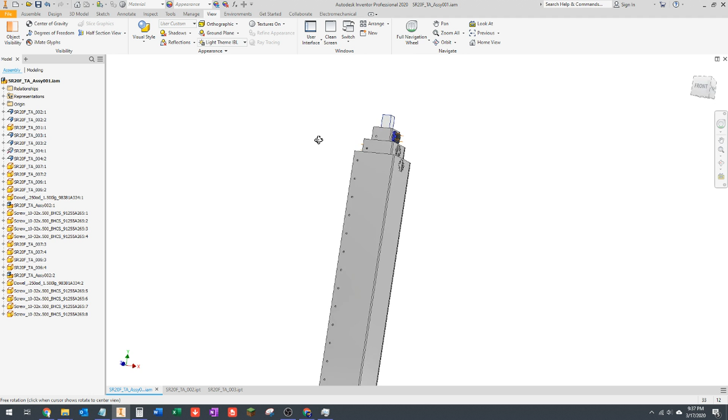No telescoping mechanism is easy to assemble. There's some things you can do to make it easier on yourself. We're not going to, like I said, this is my first time modeling something like this, so I'm not really going to worry too much about whether it's really easy to assemble and maintain. Mostly I'm just going to get it to the point where it's possible to build and then call it good.

And then if we feel like going into doing another revision at some point, that would be a project for a second iteration to improve how maintainable it is.

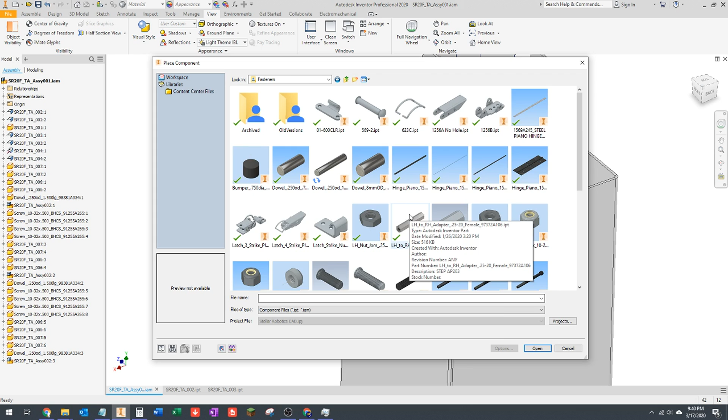Okay, so that's good. Just need the screws on that one, and then we'll be done with these little blocks, and we can move on to the actual bearings. Okay, get constrained as quick as possible.

Okay, so that is done. So basically, just to review, this pulley, there'll be another pulley and a motor down at the bottom. So you'll have this loop of belt, just like in the sketch. It'll go down, and then there'll be some sort of tensioner, idler, and it'll run around the belt, the motor pulley, which would be this circle here. And then basically, down at the bottom, this stage here, the belt runs down beside the stage, and we would use a little clamp or something to clamp the belt to this stage. So as this belt turns, it raises this stage up.

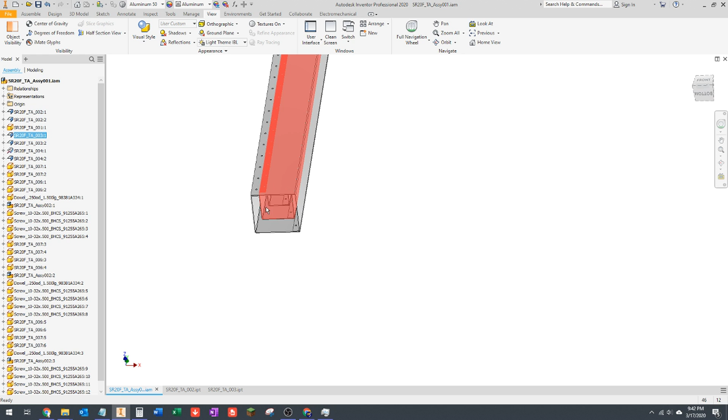And then as this stage goes up, we'll have a belt run over here, and this belt will bolt to the bottom of this stage. So there'll be another little idler just like this down at the bottom of this stage here. So basically we'll just do the exact same thing down at the bottom probably. I'm going to wait to actually do that until we get the bearings and stuff down here at the bottom to make sure there's no interferences and to make sure we don't have to design this little assembly differently at the bottom. But basically, as far as I am thinking at the moment, we'll just literally do this exact same thing down here at the bottom. So we'll have this loop of belt.

Oh yeah, that was the other thing. There's not actually a way, I meant to address this earlier and I forgot. There's not actually a way to get the belt in here. Because it's a hole and the belt is a loop. So you can't feed one end of a loop through a hole. So actually I think probably what we'll end up doing is we've got to have some way to get the belt in here. So I think we'll probably just cut the top open.

The only thing I don't like about that is it kind of reduces the strength of the part, but there's so much aluminum down here adding support that this little piece across the top's not really doing anything. So we'll probably cut this and open it up. The other option would be to cut it to the side, so you could slide the belt in from the side, but I think the top is going to be easier. The big thing is just making sure that when we do this at the bottom, there's enough room to stretch the belt and work it around this flange and get it in place, which there probably is.

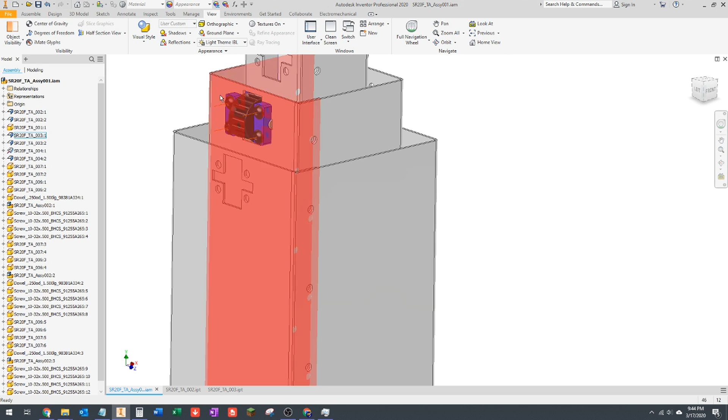That would be my only concern, because the belt's not going to have any extra length. When the belt is on this idler, it's going to be tight, so you can't stretch the belt up to get it off. So I think to assemble this, you'd probably not have any of these blocks in place. You'd get the belt in place first, then get the pulley, get the dowel pins through the pulleys and stick them through the middle of the belt somewhere, work them to the end, drop them in place, and then put the 3D printed blocks on.

What we might need to do to make this more feasible is extend this slot down so you can pull the dowel pin out this way and slide the whole thing that way to reduce tension on the belt, just for assembly. So make this cut like a quarter inch deeper.

Let's see what that looks like for a second. If I do this one, we want to cut the top out and cut another quarter inch in the bottom. So I'm just going to make this a half inch longer, and that'll accomplish both things. And then it's going to scream at me.

Yeah, that broke stuff. So actually what I need to do now, okay, well that's broken and I'm going to have to fix that, but I'm not going to do that at the moment.

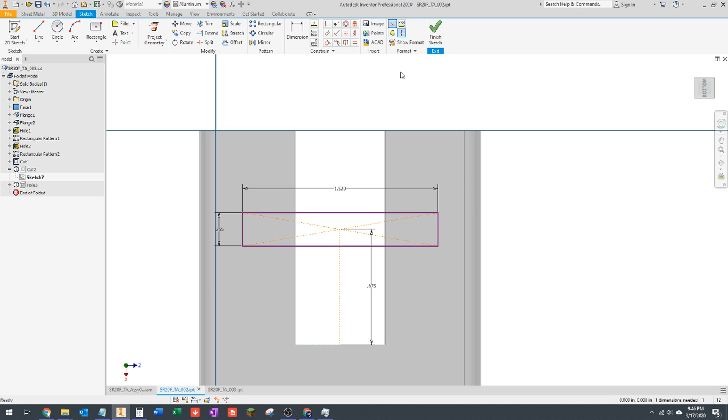And actually, if I wanted to do that, whoa, is that right? Yeah, so D47 is that dimension. So if I want to do it right, I can make this D47. I'm getting the dimension by looking up here at the little title bar, it tells you what dimension it is. So if you type in a dimension name, even if it's in a different sketch, it'll still pull that dimension value. Oh, and I forgot to make this aligned.

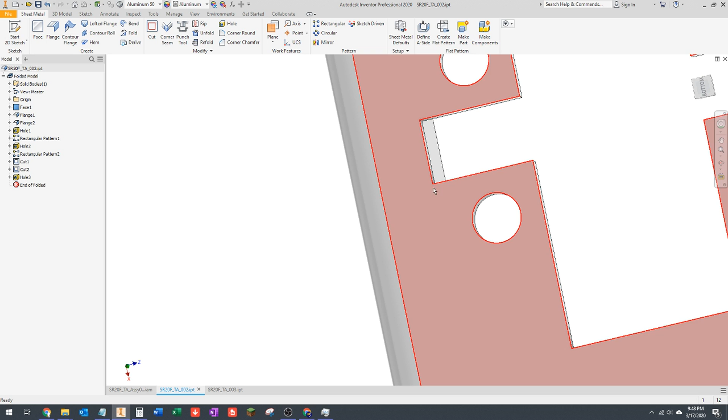The other thing I'm a little worried about is how close that is to the edge. That's not strictly speaking great for bending, but it's such a narrow thing that it might be okay. Normally you've got to be really careful how close you put holes to the edge of a bend, because when you bend sheet metal on a press brake, stuff like this just doesn't bend, and you get weird warping of the holes. This is a prime candidate for that.

So what I might end up having to do is what we were talking about earlier, and actually shorten the dowel pin. Yeah, Max, I can. So this is what we've gotten done so far. Basically we did the sheet metal and designed these little pulley blocks, and we're pretty much done with the pulley blocks. I'm not going to go ahead and open up these holes for the rest of them, we'll do that next time, or maybe I'll do that off camera before I start the stream next time. You saw me do one.

I kind of want to start working on bearings now, so let's start doing that. So top or bottom, that's the question. Let's go here. So the plan is to have at the top, the bearings attached to the lower stage, rolling against the upper stage. So we'll have a shaft through here, and the bearings will roll against this stage. And then here we'll have a shaft that goes through, and the bearings will roll against this stage.

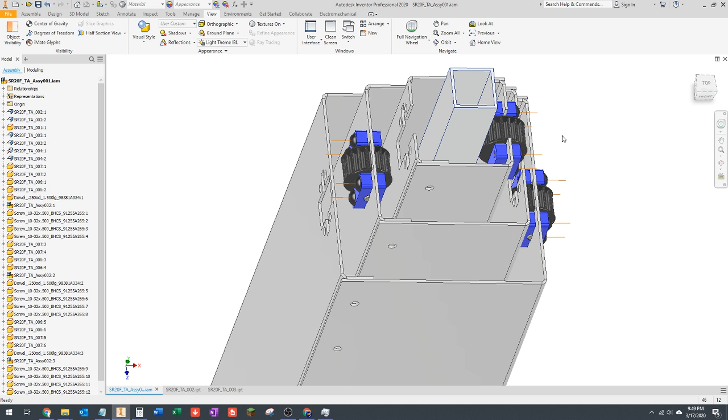On the bottom, give me one second here. I'm trying to make sure that my assembly is still... oh yeah, okay.

The video froze on my phone. I wanted to make sure I was still sending stuff. How are we doing here?

I think as it got later in the evening, people started getting off the internet in my neighborhood, and the internet got a little bit better. I did a speed test earlier before streaming and was only getting like 15, 20 megs, which is still enough to stream, but I pay for 100 and usually get like 120.

All right, so what we're gonna do here is on the top. The problem is we kind of don't have room to put a shaft.

So from here to there is 0.194.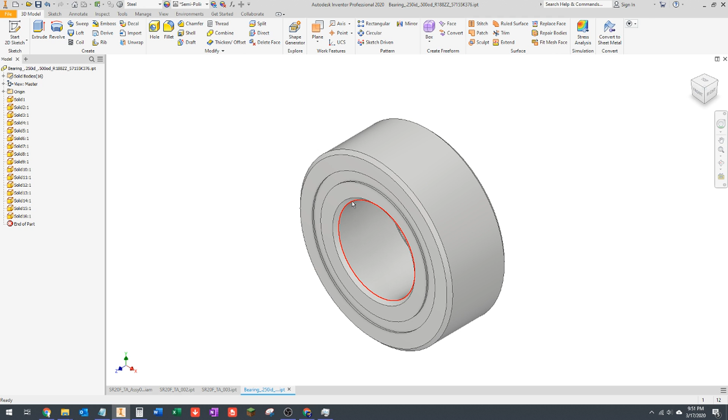So let's open up this bearing. I think it's because this is a 1/4 inch and this is a 1/2 inch. Yeah, that's what I said. So that's 1/8 of an inch between, so we have a bolt that goes through here. Basically, there's going to be 1/8 of an inch between the surface of the bolt and the surface of the bearing.

I'm kind of doing some head math here, trying to figure out if I can squeeze a hole in right here. I think the answer is no. So what I think I'm going to have to do is move this down a little bit, which isn't actually that big of a problem because we're going to have to move this around later anyways once we figure out what belt center to center distance we need to use, because that's going to define exactly where this needs to live to get the pulley center to center distance and belt length exactly right.

We can't move it much though because we really can't go below here, well, we could a little bit. We'll start running into issues where we're going to have shafts that go through here that have bearings on them, but we're not really anywhere close to that at the moment.

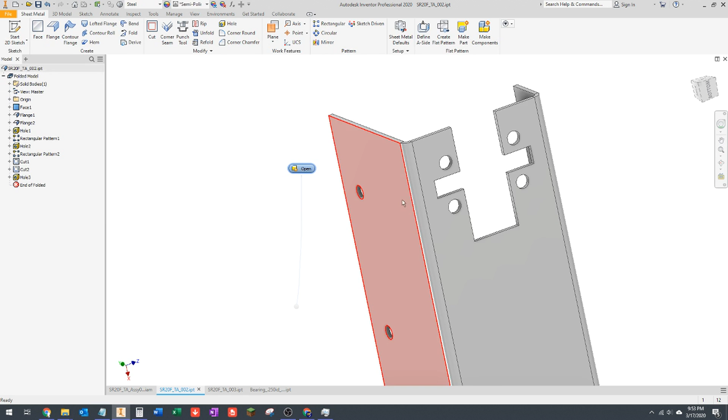So, okay, from here to, let's just do this. This is going to be easier if I just do it this way. Let's just put the holes in there, and we'll move them later.

Okay, so these construction circles represent the bearings. I want to do this kind of the same thing I was doing before. The center point, make that line vertical. I'm actually using the horizontal constraint because this is turned on its side right now. I'm going to use a work point at the intersection of these two circles.

I'm going to do 1 inch there. You can play with this a little bit. You might even want, if you really wanted to preload it so there's no slop in your mechanism, you might want to do like 0.995 or something. Not really going to worry about that right now.

These are going to represent the actual holes. I'm going to use the actual hole feature, but I'm putting these construction circles in here to visualize. Oh, the other thing I should do is put a 3/8 circle in. The 3/8 circle represents the actual bolt head because we're going to use a socket head cap screw.

So long story short, this is way too close to this. We need a lot more room. I don't really want to go any closer than that to the edge, which puts the bearing like flush with the top anyways.

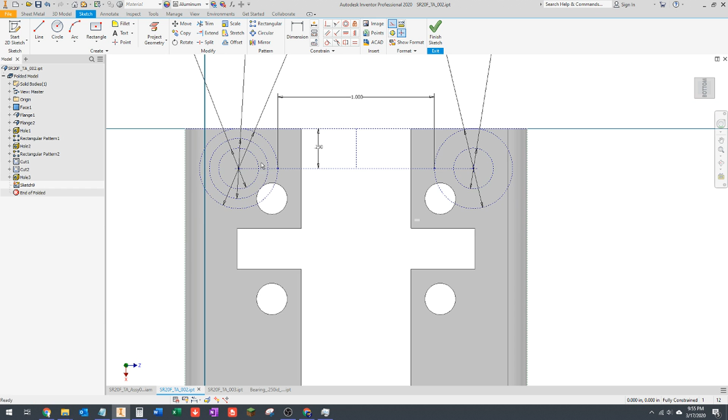Okay, so we'll do 0.255. That's a very close fitting clearance hole for a 1/4 inch. Also, this hole's really close to this bend. It's not as much of a problem with a round hole as it is with a square slot. Like this, you probably get away with it.

You will end up with a little bit of distortion though, and you'll have to chase it with a drill bit, for sure, 100%. But you might have to do that anyways just to get rid of burrs, because this hole is going to be so tight fitting on that screw. But that's important to make sure you don't have any slop in your bearings, because then you'll have slop in your mechanism.

Alright, so then there'll be spacers and stuff stacked up in here with the bearings too, to put everything in the right spot. So let's figure out how long of a screw we need. It's probably going to be some weird size, which is going to frustrate me.

2.5. Alright, that's not bad. I usually allow 1/4 of an inch for the nut. That works pretty well, it's very close. It's just barely enough, but it will work. And I think we actually have that size in here already. Yeah, we do, because we used that on our 2019 elevator.

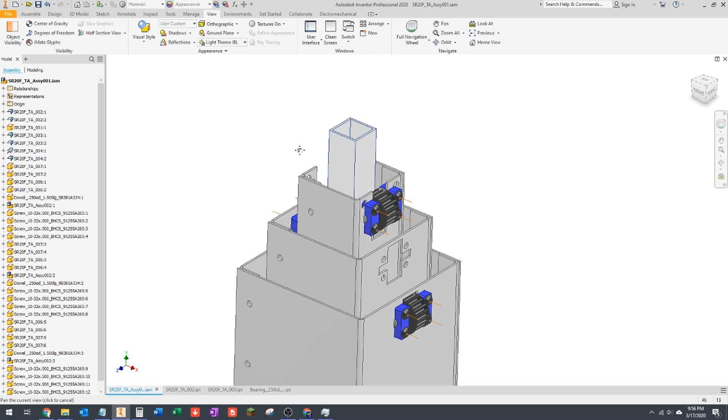Okay, put these in here. Alright, and then there's just barely enough room where you can get a nut, and it starts to engage the nylock on this side if you use a nylon lock nut, which in this case you definitely should. What is going on here? Oh, right.

Right, I can't center those holes. Oh wait a minute, did I do that? Did I make that mistake on everything? I think I made that mistake on everything. This probably isn't centered, is it? Because it's centered on this part, but it should be a 32nd of an inch this way because I didn't account for this piece of sheet metal over here.

Alright, well that's not a big deal. It requires a little bit of work to the sketch, but basically what it means is I can't do that at all, I have to do it with a dimension. So this is the actual outside, but there's another 1/16 of an inch piece of metal on this side. So I need to shift everything a 32nd of an inch that way, and then I got a dimension to the top.

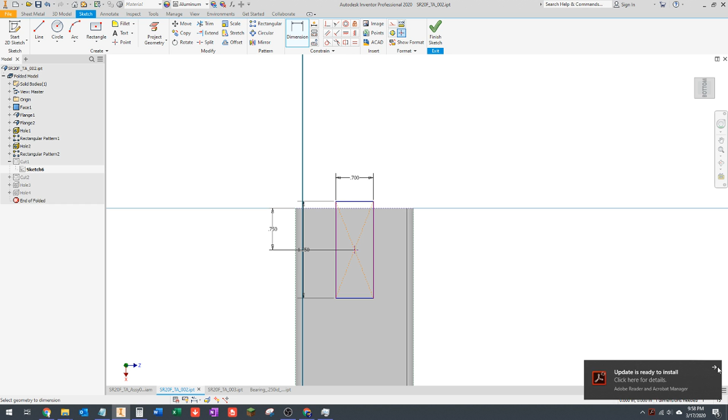Okay, and then I need to actually do that with this too. I probably only need to do it with this sketch. Put a point there. I don't care, Adobe, go away. Alright, and then add a 32nd of an inch. Alright, so now everything should be... I have to do that same stuff for this too, but it's relatively painless.

Okay, so from here to here, 365. Wait, why is it? Oh right, it's 375 plus, or with a 10,000 sticking out of it. Okay, so from here to here is 0.150, and from there to there is 0.150. So yeah, everything's centered now.

Okay, so then yeah, this is the interference here that we've got to get rid of by moving these blocks down. Unfortunately, that's going to bring back that little web at the top, which we can take care of another way.

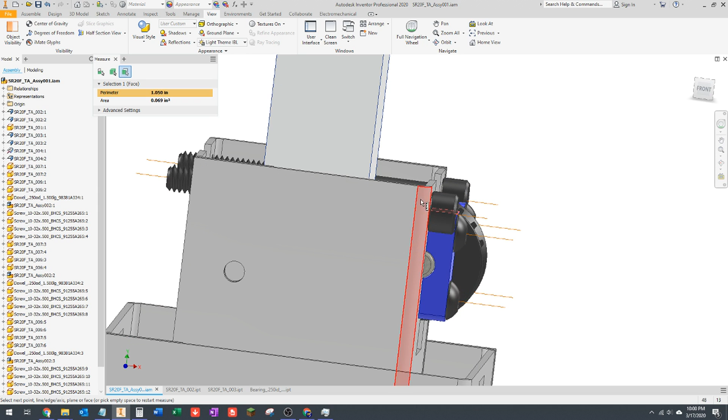So how much actual space do we need here? Now there's a nut on the other side, and the nut actually takes up more room than the screw head does, but we can avoid that problem by putting the screw heads on the same side with the idler and the nuts on the opposite side. So basically the screws would need to go in the other way on this stage, so the nuts are over here and the screws are over here.

But on this stage it's not as much of a problem as it is on this stage, because these bolts will be way out here, so they won't interfere at all. It's only an issue on this tiny top stage. That being said, we'll probably still move this down just to keep the belt center to center distances all the same, because it'll be obnoxious if they're all different. And it doesn't really get you anything to make one stage a little longer than the other one. If you're going to make one of them short, you might as well just make them all short.

Alright, so that, oh, it's right on there. So we've got to do a minimum, an absolute minimum, of 3/16 of an inch downwards. We'll probably just do a whole 1/4 of an inch.

So if I go here and make that 1 inch instead of 3/4, I'm going to make that solid, like actual geometry. I'm going to just close that off. Then what I can do is go in and select this other profile. And now it's going to scream at me again. What did I do now?

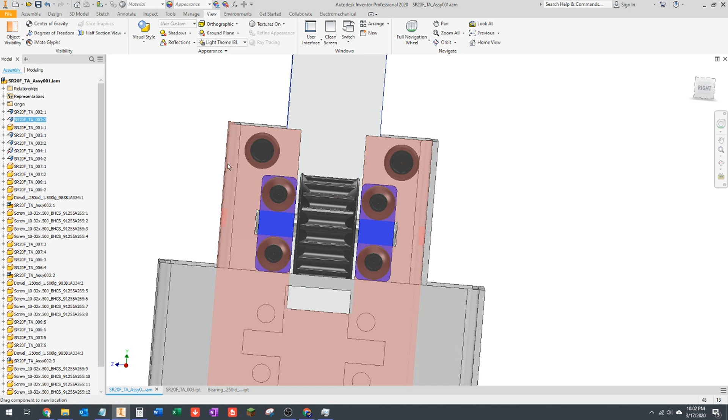Okay, so that is relatively interference free. The only issue with using bolts this small is we'll end up with bearings right on these threads, which isn't great, but we had the exact same issue on our 2019 elevator and never had problems with it.

So I'm just going to go ahead and drop some bearings in here, and we'll take a quick look at it, then probably start wrapping up. Call it a night, got work in the morning, so should probably go to bed.

Okay, so it doesn't matter. I hate these new directional axis constraints that Inventor added. I'm sure they're useful for something, but most of the time they just annoy me.

Oh yeah, that was the other thing too. Yeah, because we're gonna do one in the middle here. Is that right? Because we're gonna have this problem on every stage where if we try to put a bearing right at the corner, we've got to notch this flange.

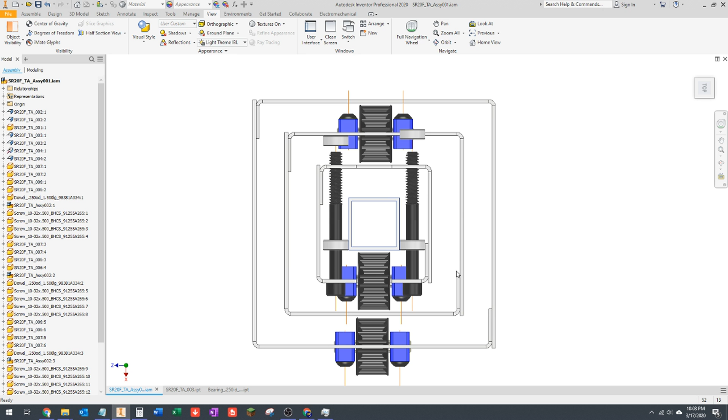But that was kind of the point of putting this hole not really close to the top, because we can just cut part of this flange away and it's not going to take out any of the strength. So I think we're going to do that, and we're going to have 4 bearings.

I don't know that this upper stage really needs it, just because it's a single tube, so having 1 bearing in the middle on these 2 sides and then 2 bearings on the other sides is probably fine.

Now, we absolutely have to have... wait, how did I plan to do that? Oh. Okay, so these bearings are supposed to be above this pulley.

All right, so we're gonna have to just get really creative with how we squeeze everything in there. So we might need to push this down a little bit farther to make some room, or we might just have to buck up and move these up a little bit. All right, I'm not gonna worry about it right now though.

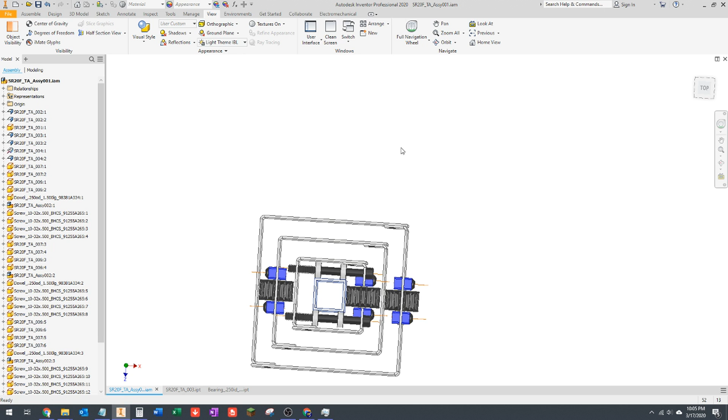So there to there. There to there. Okay, so that's basically the generic bearing arrangement, and then there'll be little 3D printed spacers in all 3 of these empty spaces to kind of keep these located.

And then basically we're going to do the same thing in the other direction. So we'll put holes here and here, run bolts across slightly below or slightly above these, and have bearings that run on the other side. The big issue is we've got to make sure those bearings don't interfere with this belt pulley, which is going to be a bit tricky.

I'm not sure that we're going to be able to get away without moving this down more. The problem is that we're gonna have bolts going across here as well, and so if we move this down any more than it is, we're gonna start interfering with those bolts.

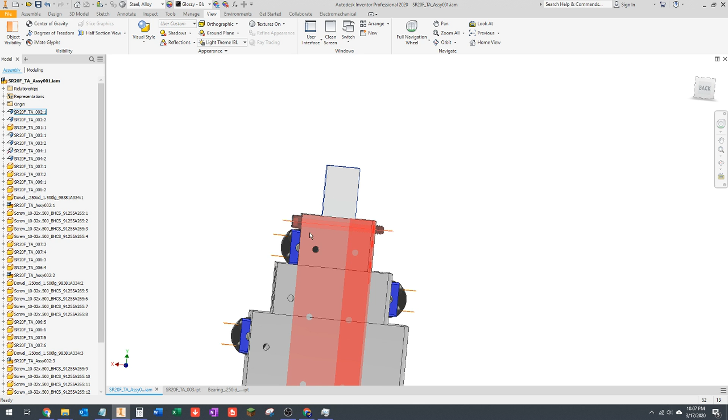That being said, if we go this way first, and then have the bolts that go across this way below these bolts, like if we put the holes here, then that puts the holes that go across this way down here. Okay, well that's going to be a bit tricky, but yeah, I think it'll fit.

We're just going to have to kind of move stuff around as we work. And this is how design always works in FRC. You never just model it and get it right the first time. You're always going to have to go back, and you're always going to have to make tweaks to your design. So it's important to do your CAD in a way that allows you to make changes to your design as you go.